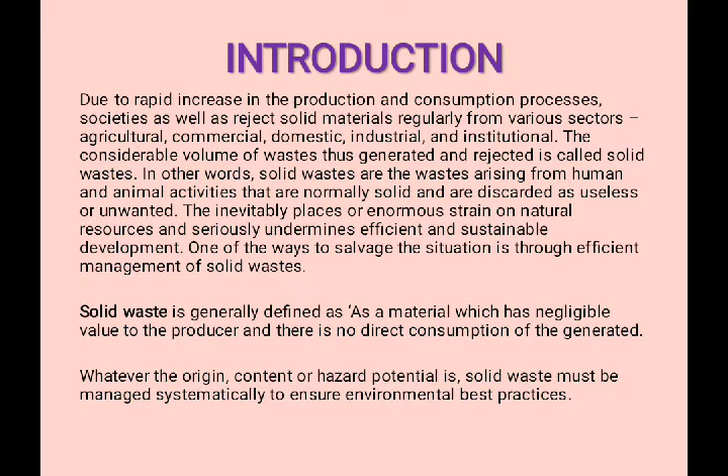The inevitable places enormous strain on natural resources and seriously undermines efficient and sustainable development. One of the ways to salvage the situation is through efficient management of solid wastes. Solid waste is generally defined as a material which has negligible value to the producer and there is no direct consumption of the generated. Whatever the origin, content or hazard potential is, solid waste must be managed systematically to ensure environmental best practices.

The main sources of solid wastes are municipal solid waste like street sweeping, sewage treatment plant waste, waste from schools and other institutions. Domestic waste like garbage, rubbish, paint, paper, glasses, old toys, old clothes, spoiled food. Commercial wastes from stores and offices. Mining wastes from coal mining and strip mining.

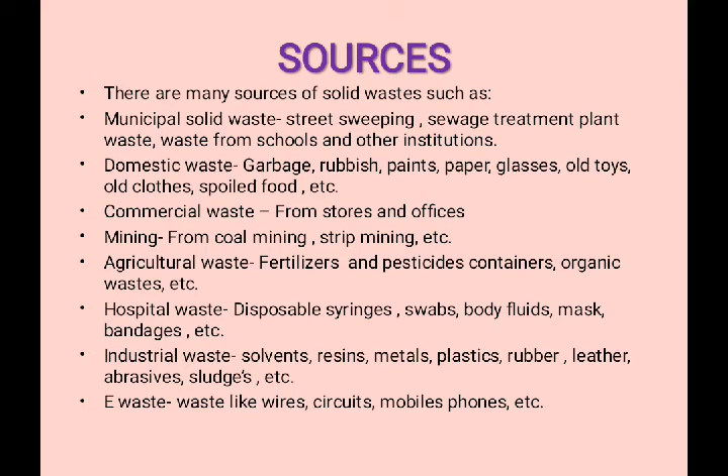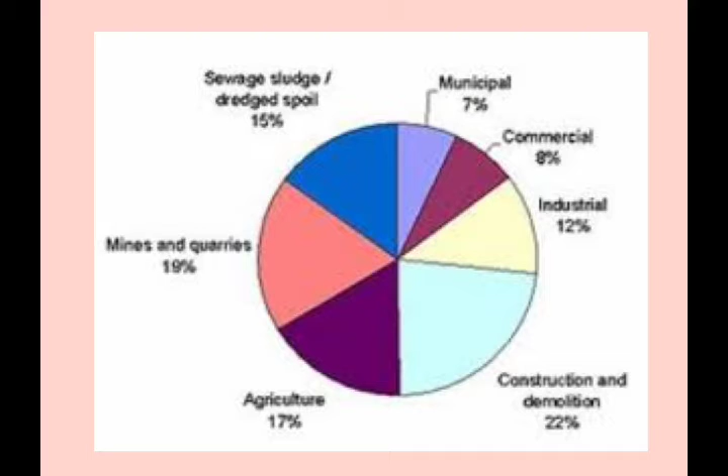Agriculture wastes like fertilizers and pesticides containers, organic wastes. Hospital wastes like disposable syringes, swabs, body fluids, masks, bandages. Industrial waste like solvents, resins, metals, plastics, rubber, leather, abrasives, sludges. E-wastes like wires, circuits, mobile phones. These are the different modes of solid wastes. The pie chart shows the different solid wastes from different sectors.

The effects of solid waste. Solid waste changes properties of soil, air, and water causing pollution. Solid waste produces foul smell, breeds insects and organisms, leads to spread of many diseases and infections affecting human and animal population. Very harmful chemicals are released into the environment. It affects our climate. If the solid wastes are not treated properly, decomposition and putrefaction may take place. The organic solid waste during decomposition may generate obnoxious odours.

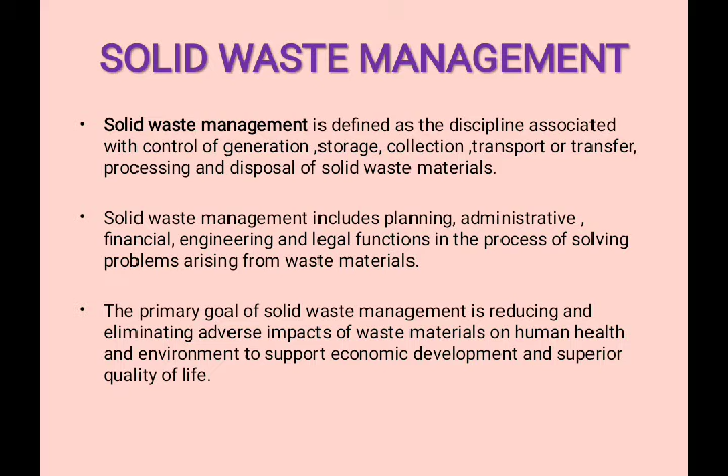Solid waste management. Solid waste management is defined as the discipline associated with control of generation, storage, collection, transport or transfer, processing and disposal of solid waste materials. Solid waste management includes planning, administrative, financial, engineering, and legal functions in the process of solving problems arising from waste materials. The primary goal of solid waste management is reducing and eliminating adverse impacts of solid waste materials on human health and environment to support economic development and superior quality of life.

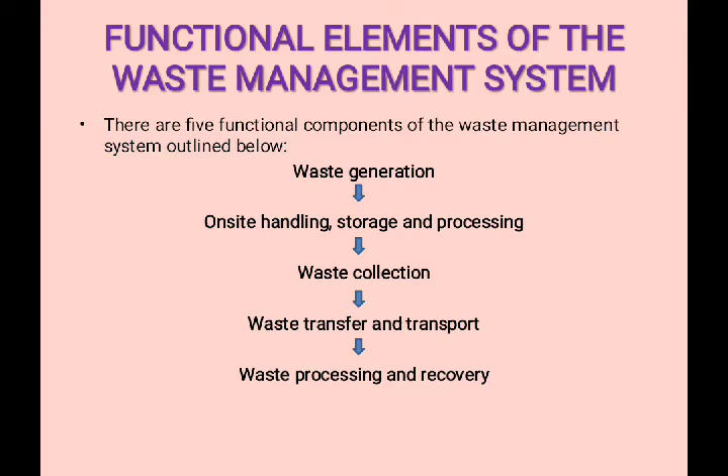There are five functional elements of waste management system which are waste generation, on-site handling, storage and processing, waste collection, waste transfer and transport, waste processing and recovery. The diagram shows the functional elements of waste management system. Solid waste treatment. There are some methods available for management of solid wastes. It includes segregation, reduction, reuse, recycling, chemical, biological and thermal conversion.

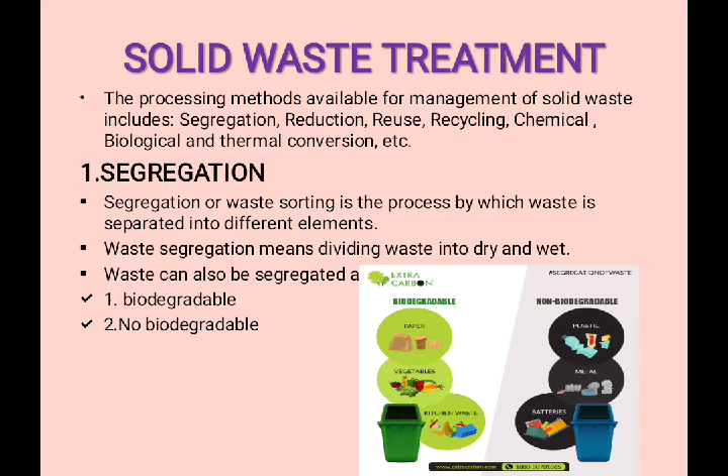The first method is segregation. Segregation or waste sorting is the process by which waste is separated into different elements. Waste segregation means dividing waste into dry and wet. Waste can be segregated as biodegradable or non-biodegradable.

Reuse, reduce, and recycle. Reduction is the most important strategy of the 3Rs. It focuses on the source of waste, or where the waste is originally coming from. Source reduction is carried out when products are designed, manufactured, packaged, and used in a way that limits the amount or toxicity of waste created.

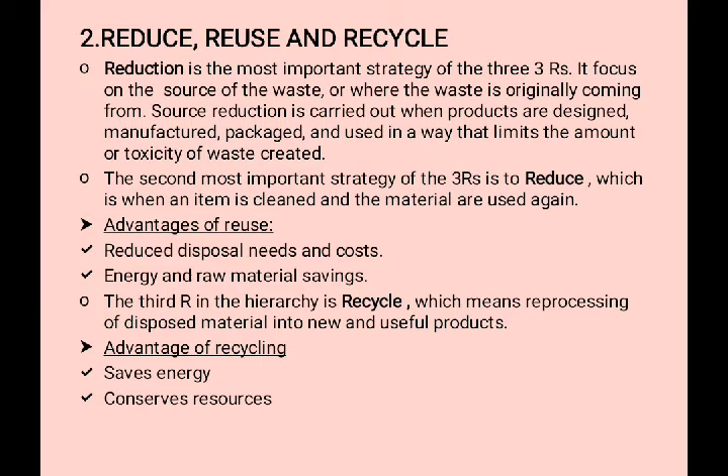The second most important strategy of the 3Rs is reuse, which is when an item is cleaned and the material is used again. Advantages of reuse: reduced disposal needs and costs, energy and raw materials saving. The third R in the hierarchy is recycle, which means reprocessing of disposed material into new and useful products. Advantages of recycling: saves energy, conserves resources.

Third method is chemical processing. Chemical processing involves the chemical transformation or conversion of organic wastes into various useful compounds such as glucose and synthetic oils or gases, etc.

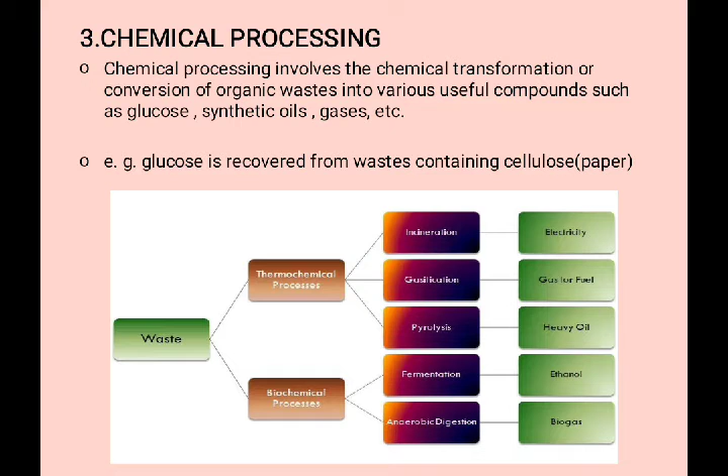Composting. It is a controlled biological decomposition of organic matter such as food and yard wastes into humus. Composting is the natural process of rotting or decomposition of organic matter by microorganisms under controlled conditions. It can be anaerobic or aerobic. This process takes about 4 to 6 weeks.

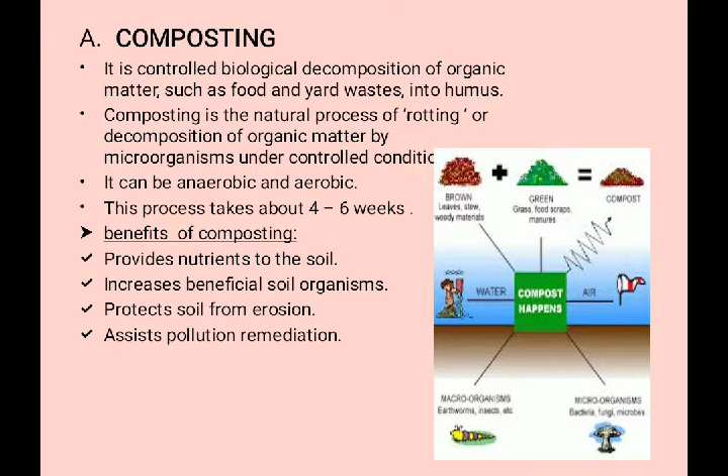Benefits of composting: it provides nutrients to the soil, increases beneficial soil organisms, protects soil from erosion, assists pollution remediation.

Landfilling. A landfill site is a site for disposal of waste material by burial and is the oldest form of waste treatment. Waste is directly dumped into mining voids or borrow pits. Disposed waste is compacted and covered with soil. Gases generated by decomposing waste material are often burned to generate power. Landfilling can be done by 3 methods: trench method, area method, and ramp method.

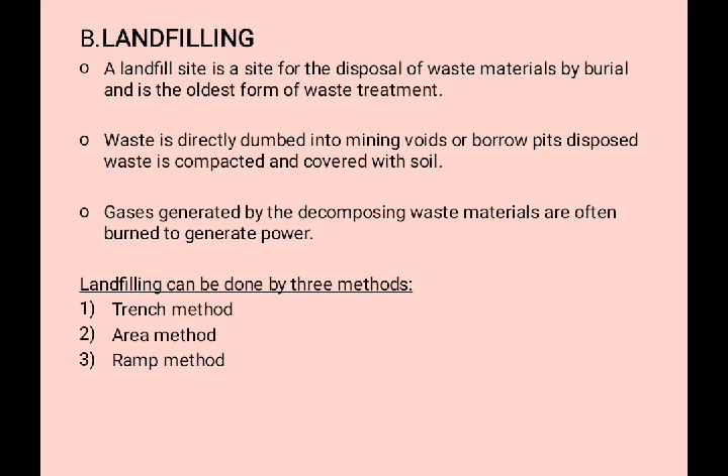Trench method. The trench method consists of an excavated trench into which solid wastes are spread, compacted, and covered. The trench method is best suited for nearly level land where the water table is not near the surface. The second method is area method. The area method is best suited for flat or gently sloping areas where some land depressions may exist. The wastes are spread, compacted, and then covered.

The third method is ramp method. It is also known as depressions method. The slope or ramp is sometimes used in combination with the other two methods. The wastes are spread on an existing slope, compacted and covered.

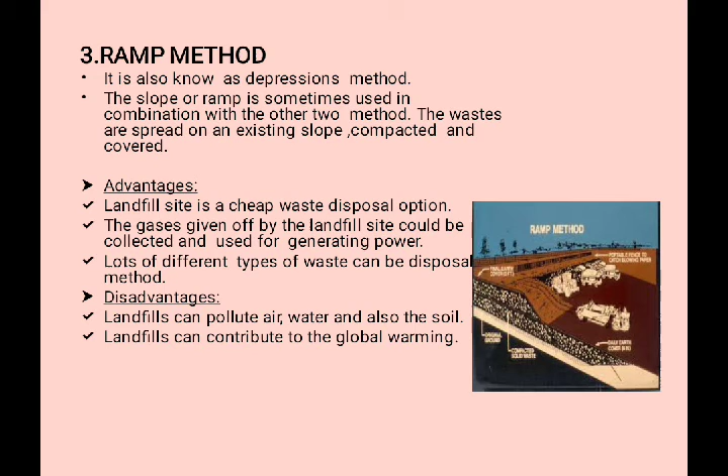The advantages are: landfill site is a cheap waste disposal option. The gases given off by the landfill site could be collected and used for generating power. Lots of different types of wastes can be disposed. Disadvantages: landfills can pollute air, water, and also the soil. Landfills can contribute to global warming.

Incineration. Incineration is a waste management technology that involves the combustion of organic material or substances. It is carried out at high temperature. The waste material is converted into ash, flue gases, particles, and heat. There are 4 types of incinerators: moving grate, fixed grate, fluidized bed, rotary kiln.

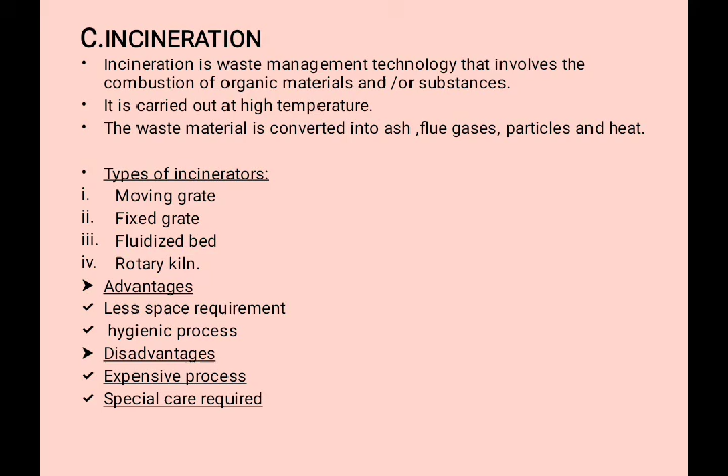Pyrolysis. Pyrolysis is a thermochemical decomposition of organic material at elevated temperatures in the absence of oxygen. It involves the simultaneous change of chemical composition and physical phase and is irreversible. An external heat source is employed. It yields gaseous, liquid, and solid fractions.

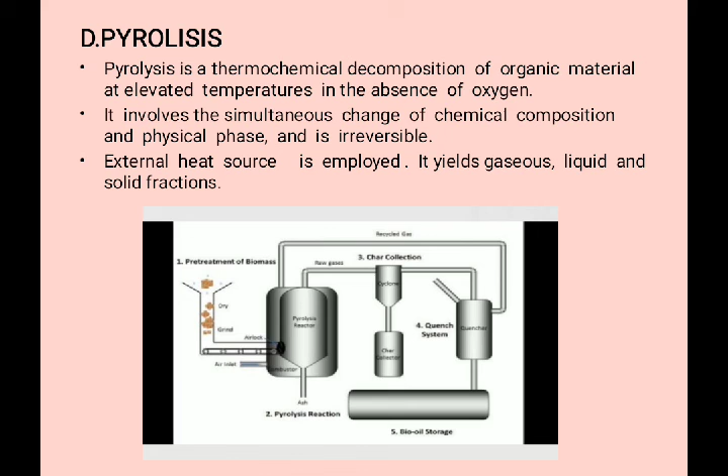Recommendation: the involvement of people and the private sector through NGOs could improve the efficiency of solid waste management. Public awareness should be created, especially at primary level. Littering of solid waste should be prohibited in cities, towns, and urban areas. Moreover, house to house collection of solid waste should be done.

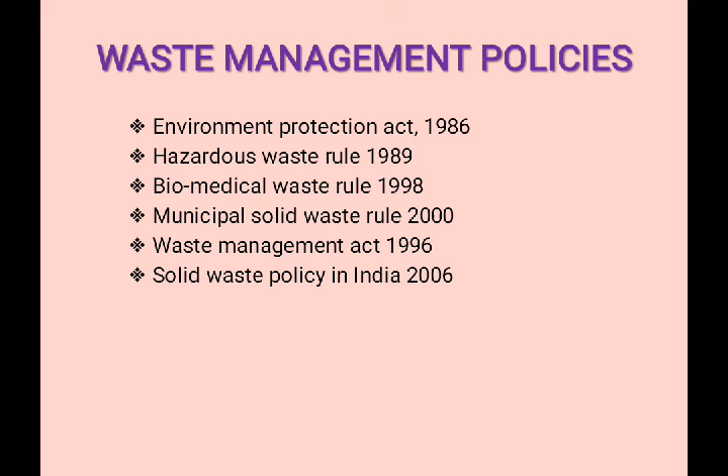There are some waste management policies like Environment Protection Act 1986, Hazardous Waste Rules 1989, Biomedical Waste Rules 1998, Municipal Solid Waste Rules 2000, Waste Management Act 1996, Solid Waste Policy in India 2006.